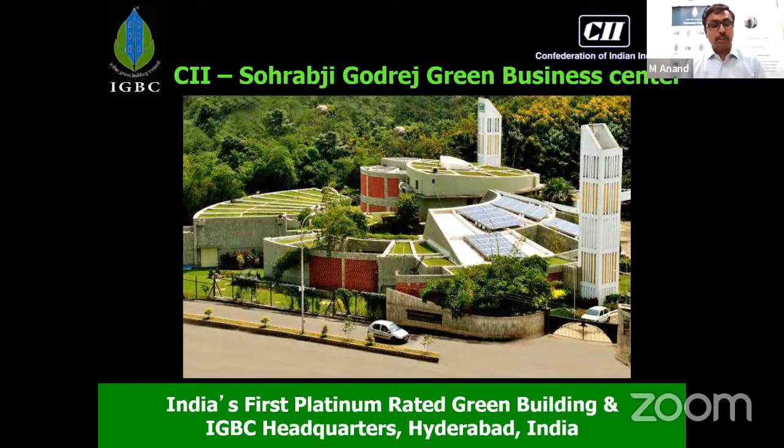Jain Saab was involved right from day one of our own IGBC headquarters becoming a world-class, world's greenest building. This is our own headquarters, CII Sohrabji Godrej Green Business Centre, which earned the World Green Building Council's title of world's greenest building, way back in 2003, 20 years ago, and India's first platinum rated building, wherein Dr. Jain Saab played a very pivotal role in getting this title.

This building got inaugurated by another champion, His Excellency late Dr. APJ Abdul Kalam Saab, on 14th of July. Dr. Jain Saab has interacted with Abdul Kalam Saab in very many forums of IGBC.

For those who are not part of IGBC, it stands for Indian Green Building Council, under CII, started way back in 2001.

The vision of the Indian Green Building Council is enabling sustainable built environment for all. When we say all, that includes human beings and all living beings on planet Earth - it goes beyond human beings. That gives IGBC a great canvas to do many initiatives and activities, which includes the Harit Prem Bharat Mahotsav 2023, and we in IGBC always look forward to these initiatives.

In the process, we want India to become one of the global leaders in sustainable built environment by 2025. Our chairman, Dr. Prem Jain Saab, always says Bharat should be the Jagat Guru of sustainability. That gives us enormous energy to recommit ourselves when we participate in Harit Prem Bharat Mahotsav again.

With the support of all stakeholders, we in IGBC are very proud to get enormous support from the government at both the center and the state, architects, MEP consultants, engineers, the common man, as well as MOU partners and developers - all of them today.

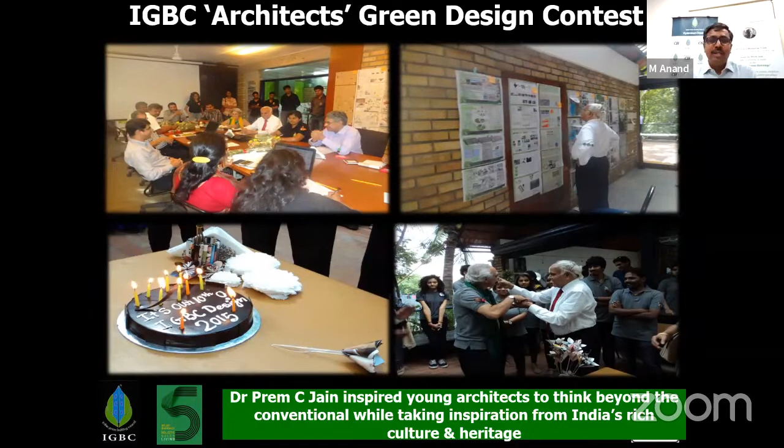Every architectural competition event, he would never miss it. In fact, Sharik Mistri's office is being fully converted into IGBC's office to showcase the architectural design competition. Every minute spent in those 2 days, we remember Dr. Jain Saab's presence - even today he is there in one corner, listening to all of us at the architecture office for this competition.

Fifth is the Green Building Congress - what it was before he took over, and what he added from 2005 onwards. You can see him along with Dr. Kalam Saab, sharing the dais as President of India, who came and addressed the event.

Till 2018, he shaped up the Green Building Congress and took it up in leaps and bounds, making it Asia's largest Green Building Congress and exhibition with the support of the entire IGBC board and stakeholders. These are the 5 elements I wanted to highlight as we celebrate the 5th year of the Harit, Prem, Bharat Mahotsav. To touch on a macro level, I will take a few more minutes.

Forging relationships - in fact, Dr...

And he also celebrates every single contribution by all of our stakeholders and the country's achievements. Here you see glimpses of the celebrations, cutting a cake for 5 billion, or launching new chapters. So he was always very, very keen in celebrating the success of India's growth on the IGBC.

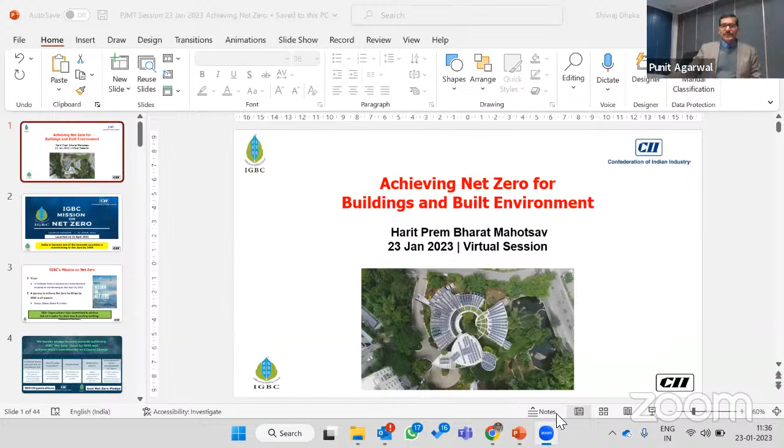Shivraj: Yeah Punit, just a moment, let me share the screen. Once it's visible, please let me know. Yes, it is visible. I will turn this off, make it full screen. Yeah, yes, okay. Is it full screen? Yeah, it's fine.

So good morning, everyone. It is my pleasure and privilege to be part of this very important program, Harit Prem Bharat Mahotsav. It is the first session, as we have already heard. It is always great to be part of a session where Mr. V. Suresh, past chairman of IGBC, is present. Thank you, sir, for setting the context for this program and highlighting key contributions of late Dr. Prem Jain. We are really thankful to Mr. Payal Jain for his virtual, gracious presence. My colleague, Mr. M. Anand, Deputy Executive Director, already mentioned the key milestones we have achieved in the past with the support of Dr. Prem Jain and his leadership to bring more and more green buildings all across the country.

So I would like to make a small presentation which will highlight the ways to achieve net zero. Let me start the presentation.

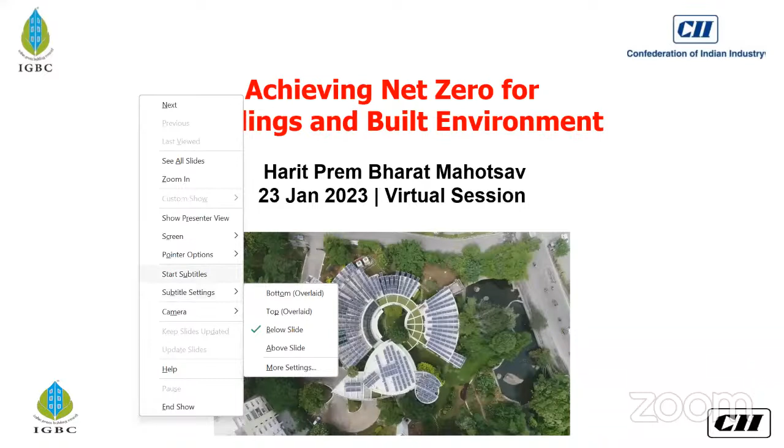The building you see here is IGBC headquarters, as my colleague Mr. Anand already mentioned. This is the first net zero project of the country, an existing project which has been transformed to net zero through deep retrofitting, including air conditioning, air distribution, the chiller plant, and many more things we did to convert this building into net zero.

IGBC started its mission on net zero in 2021, to have more corporates and building stakeholders aspire for net zero. But before that, in 2014, IGBC started dialogue on net zero and worked across the country to understand the building transformation journey, converting green buildings into net zero and creating a net zero movement. The mission of IGBC for net zero is to facilitate India to become one of the foremost countries in transforming to net zero by 2050.

This is a journey to achieve net zero buildings by 2050 in all aspects: net zero energy buildings, net zero water buildings, zero waste to landfill, and finally net zero carbon. Till date, more than 300 organizations, including the biggest corporates of India, have already committed to achieve net zero status for their new as well as existing building stocks.

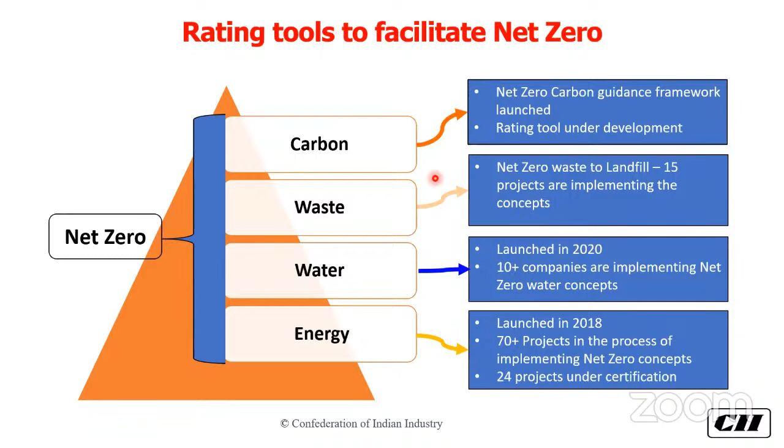Net zero waste, again, is not having much monetary benefit today, because it is a problem all across the country with regard to waste management. But slowly it will address some of the major milestones where we have this kind of issues, and waste would be 100% wealth for each project. Currently, we are running one project with Enterprise Singapore to bring some key technologies to India with regard to net zero waste. Friends, while having energy, water, and waste, we are completely at the edge to get net zero carbon. So there would be measures to address the scope 3 emissions, and have our buildings ready for net zero carbon, achieving it for most buildings with regard to energy, water, and waste. So IGBC has more than 100 projects all across the country with regard to this framework.

So let me introduce the IGBC definition with regard to net zero. Any building which has been designed for the lowest energy demand, and which can achieve the highest energy efficiency during operation, and whatever remaining energy we have, either for a new building to forecast, or for an operational building, this should come from renewable sources. This is the simple definition IGBC has set for net zero energy buildings.

This is well aligned with the policies of the Bureau of Energy Efficiency, wherein they have defined a net zero building as one that relies on renewable sources to produce as much energy as it uses, usually measured over a year. We cannot tell a building to become net zero energy on an hourly, daily, or monthly basis - it is very difficult to do that. But on an annual basis, if we do these calculations and are able to make it 100% grid energy replacement by renewable, we can call our building net zero.

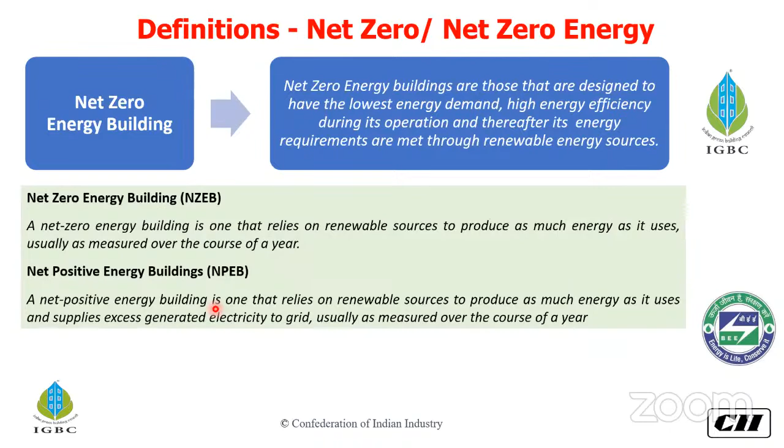With regard to net zero energy positive building, any building which has excess renewable energy generation compared to total energy consumption from the grid can be called net zero energy positive as well. So these are the benchmarks which are used by IGBC for net zero energy buildings.

Any building where EPI is less than 10 kWh per square meter per year can be called Shunya label, or a net zero energy building. Whereas Shunya label plus, or any building which is net zero energy positive, their EPI should be 0 or less. This is only possible when we have more renewable energy generation than our total grid energy consumption.

So the net zero energy building framework is voluntary, consensus-based, developed by IGBC. This rating system purely works on a performance-based approach. This means we cannot have a building that does not settle down its grid energy consumption through renewable. Only having 100% replacement of fossil fuel based energy by renewable can make it a net zero building.

This rating system, as mentioned earlier, was developed in 2018, having many projects all across the country of different size and shape. One of the most beneficial aspects of this rating system is that any building under design may address several passive measures which will reduce energy consumption throughout the lifespan of the building. The second part is that adoption of this rating system will definitely cut down the energy demand of the building - it can reduce 30% to 70% based on building size or typology, wherein we want to address the energy conservation building code as part of the design measures.

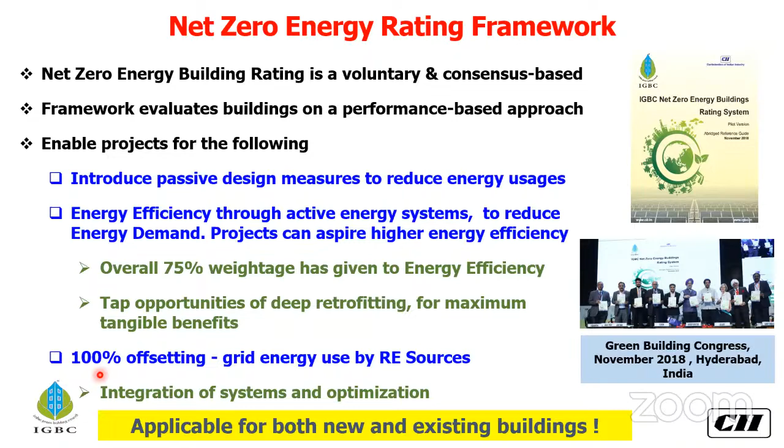This rating system also encourages and offers immense opportunities for existing buildings to understand and identify the gaps while having deep retrofitting, to achieve and set the target for net zero. But the condition extremely essential for all buildings to become net zero is 100% offsetting. So this rating system is applicable to any type of building, either new or existing, with regard to IGBC rating framework.

While having a net zero rating framework, there are two important policies which give better leverage for different project types: renewable energy policies, enforced and regulated by MNRE, as well as energy efficiency measures enforced by Bureau of Energy Efficiency. Both are well addressed in our rating system of net zero.

When we consider the holistic approach of net zero, there are a couple of important measures to remember. This rating system addresses specific measures - we may have 10 measures, we may have n number of measures. Each measure would be simulated to forecast how much energy can be reduced by implementing them. Whatever passive measures we put would help the building throughout its lifespan to reduce energy demand.

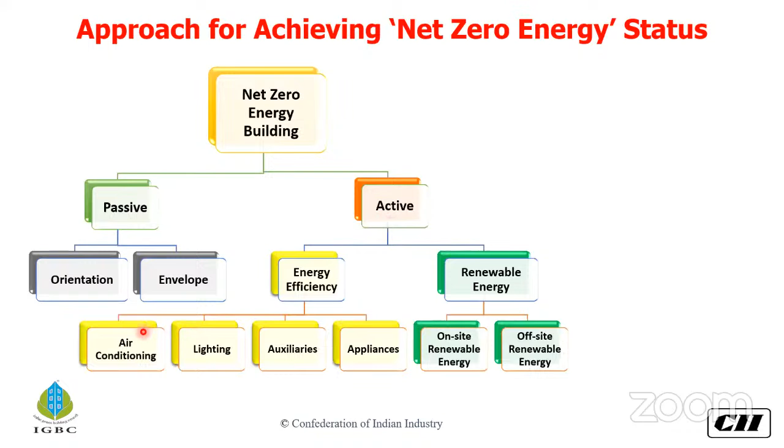When we talk about active energy efficiency measures, there could be measures related to air conditioning, lighting, auxiliaries, appliances. These measures would help the project reduce energy demand so that our dependency on renewables is much lesser. These are a couple of examples, passive and active, that can reduce building energy consumption.

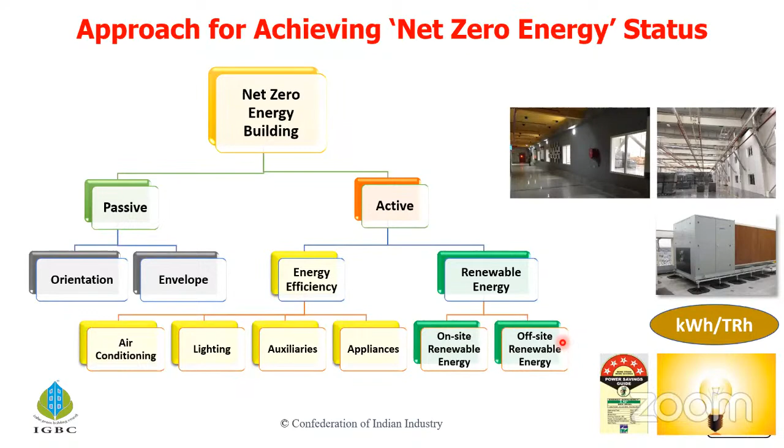Whatever energy consumption is left, because some buildings which are 24-hour operational may have huge energy intensity, it is not possible to have 100% on-site renewable. So a project may have on-site RE based on their capacity, utilization, or contract demand, and the remaining energy should come from off-site renewable sources, which can involve a purchase power agreement with the DISCOM or RE service providers. So considering energy efficiency will have huge benefits for the project.

When we have energy efficiency, let me tell you some projects have achieved and reduced energy consumption, starting from 172 down to double digits, less than 90. This kind of transformation would elevate the aspiration level for existing buildings to convert into net zero.

While coming to renewable energy, although the weightage is only 25%, it doesn't mean we're getting only 25% renewable energy for the project. 100% offsetting is essential, but the weightage on the point scale is 25%. So a project may have net metering, an on-site arrangement just to balance renewable versus fossil fuel-based energy, as well as go for metering with regard to wheeling, so that both would be accounted together to make the building net zero.

Some key requirements for net zero: first, the total energy consumption, whether from grid only, DG only, or grid and DG together, should be replaced by renewable generation. Second, this should also meet the compliance requirement with regard to ECBC 2017. There's an example here.

You can have a building consuming 1,30,000 units as per the ECBC requirement. In actual, this building may be consuming 1 lakh units. The built-up area is 2,000 square meters. We calculated the EPI, which stands for Energy Performance Index. The actual EPI of the building is 50, the design EPI is 65. This means our building is better than the compliance requirement. The EPI ratio, which is just dividing the actual by the design, is 0.76. This means we are meeting the compliance requirement and our building is far more efficient than the code compliance requirement.

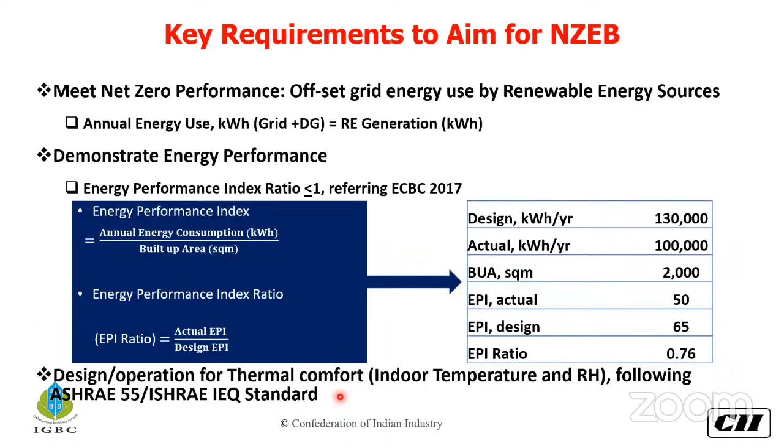The third important requirement is that any building designed for net zero should also satisfy the requirement of IEQ, Indoor Environment Quality. This means there would be some codal requirement with regard to ASHRAE 55 or ISHRAE IEQ standard. If you are meeting these targets, the building can certainly achieve net zero.

There are a couple of examples to highlight how to achieve energy efficiency. There would be requirements for envelope measures with regard to roof assembly, wall assembly, and the fenestration.

Second requirement is air conditioning, which is the main contributor for net zero, because more than 40 to 50%, or even more, of energy goes to air conditioning. The last requirement is lighting and appliances.

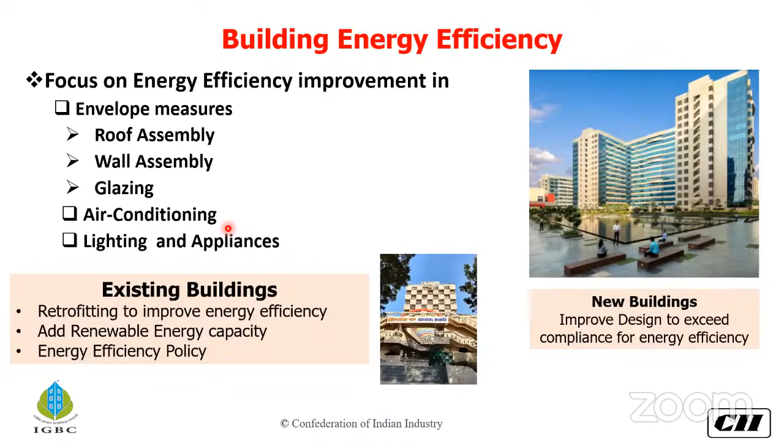I will just go through these quickly, as there are other slides where we may focus more. When we talk about roof assembly, there are requirements specified by the Bureau of Energy Efficiency. There are different climatic zones, and we should focus on achieving the lowest U-factor, or overall heat transfer coefficient, so that heat ingress is reduced, which helps reduce the sizing of the air conditioning. These are some of the other requirements for wall infrastructure or wall assembly with regard to code compliance.

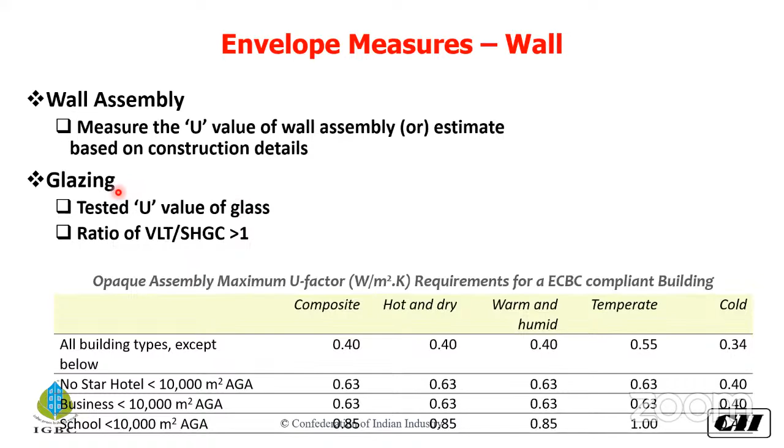But we should also look after the fenestration part very carefully, so that heat penetration is much less through the glass.

With air conditioning, where maximum conservation is possible, we have to focus on what coefficient of performance or IPLV is appropriate for the air conditioning system selected for our building. This is very important because most buildings would have this opportunity.

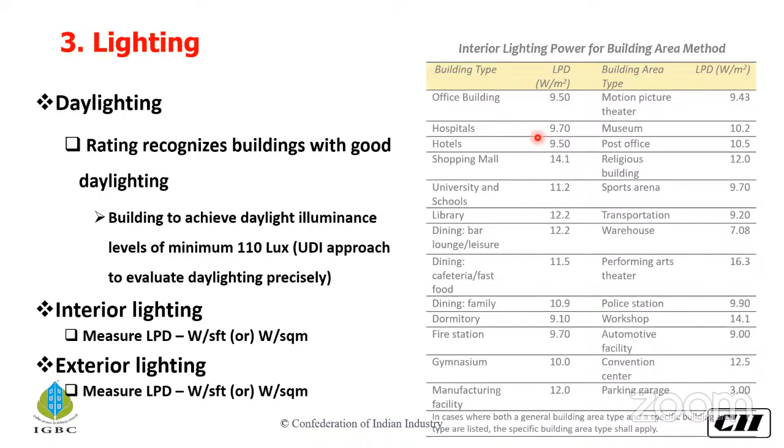There is an opportunity to reduce energy consumption by introducing more daylight, as well as focusing on reducing lighting power density. There's a table given here that specifies what the lighting power density should be for a given office building, hotel, hospital, or any other type of building.

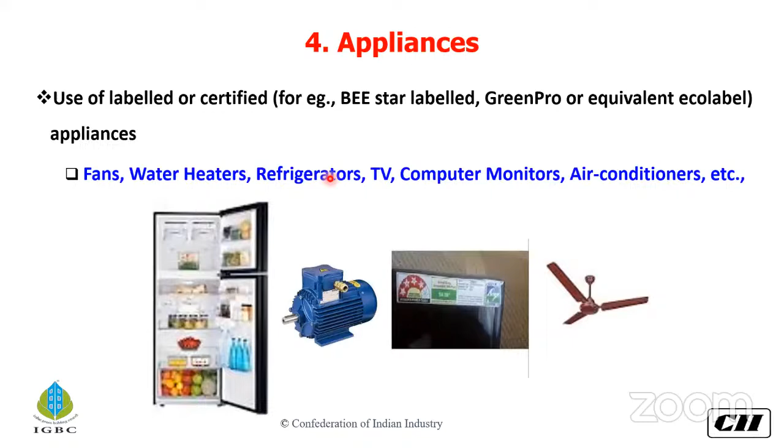There are more requirements with regard to appliances. More than 17 to 18 different categories of appliances are rated by the Bureau of Energy Efficiency and green product certification, wherein several products are certified. If we use these products in any net zero building, they would simply reduce our energy consumption and bring more energy efficiency into the project.

The last part is renewable energy. There is a mandatory requirement to have at least 5% on-site renewable energy, but most projects with daytime operation may harness more renewable power during the day. At nighttime, it's not easy for them, and they may not have the opportunity for a windmill. So these projects tie up with RE vendors for hybrid power, combining solar and wind, so there's supply of power throughout the day and night.

There are two certification levels with regard to net zero energy. One is net zero energy, wherein a project may achieve the highest energy efficiency, but there's a limitation on not having 100% renewable on site. This kind of project can get a net zero energy status.

The net zero energy platinum means a project is able to have more renewable energy on site. At the same time, it has energy efficiency, and both the renewable and energy efficiency scores together give more than 80 credit points out of a 100-point scale.

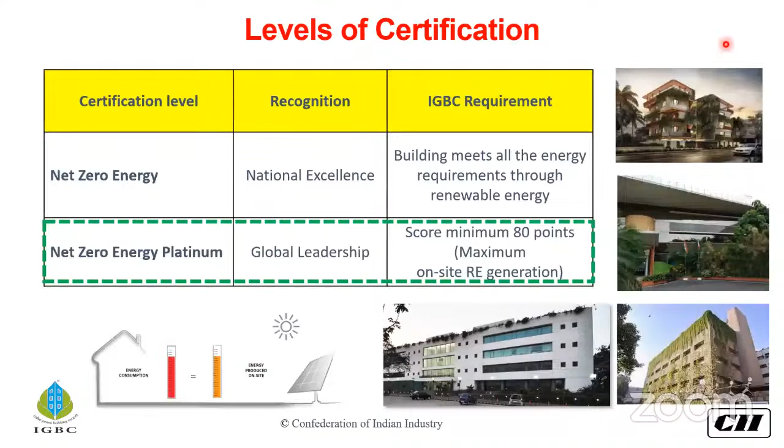There are a couple of photographs of some early adopters of net zero energy. If we talk about the most tangible benefit of net zero, it's getting a reduced energy bill of at least 30 to 40%, based on the building type, size, or usability. It will also have lower power demand. And if we understand the hierarchy of energy use reduction, it may affect several components in the building, including wiring, transformers, and many other equipment.

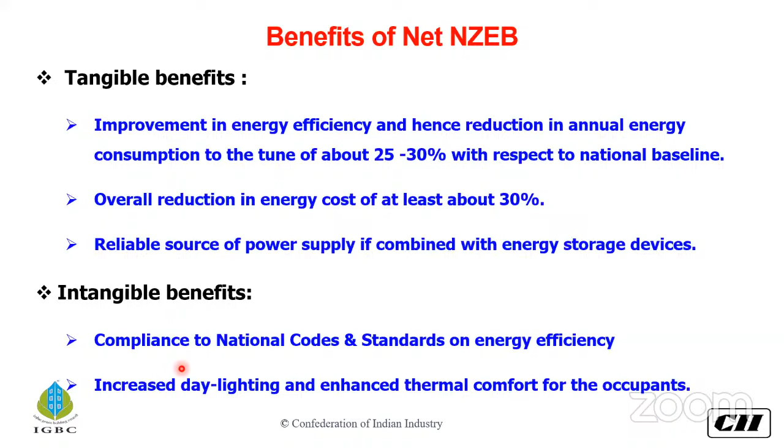But getting the tangible benefit is not the only mandatory condition today. There are many compliance requirements across the country, starting from the Bureau of Energy Efficiency, SEBI, and many others. There are intangible benefits and compliance requirements for net zero energy buildings for several projects or corporates. Projects are doing this because they've already committed to climate change mitigation measures, and they're getting more intangible benefits out of that.

I'd like to show you one case study, of the IGBC headquarters: complete retrofitting of all chillers, although they were the highest energy efficient in the industry when installed in 2001 or so. When we retrofitted them, we found the highest energy efficiency while having part load efficiency, because our office is not loaded at 100% occupancy throughout the year.

So it's really important what kind of equipment we select, based on the typology of our office as well as its usability. This is showing how we did the retrofitting of the lighting system.

You are able to see many lighting fixtures installed because their efficacy is less. These are CFL based lighting fixtures. Their number was more than 211, but when we retrofitted with LED, they are hardly 86. Their efficacy is more than double what we had with CFL, and their wattage is just half. So this is the impact of having LED based lighting fixtures.

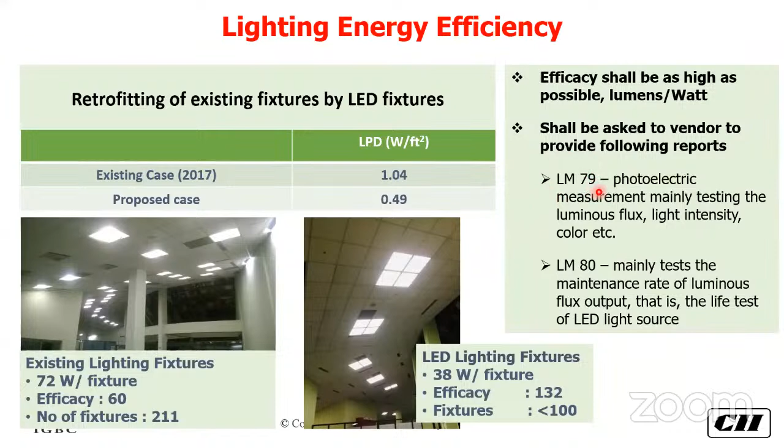But we should really care what kind of lighting fixtures can be procured. We should ask the vendor to give the LM79 report and LM80 report, so that we get the highest quality of LED fixtures. This is showing what could be the tangible benefits.

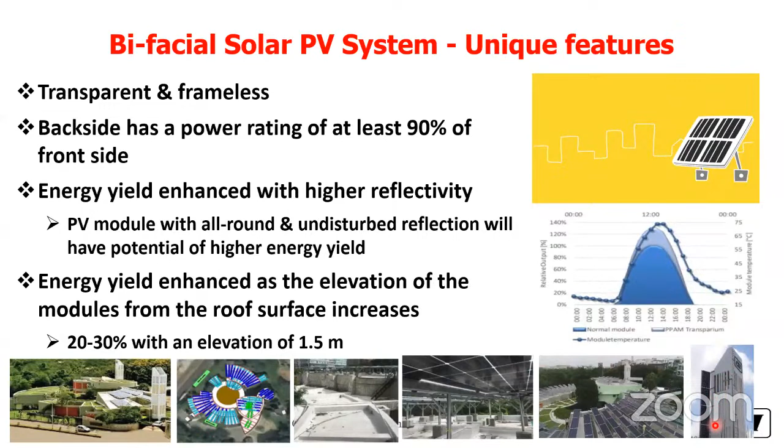This is how our building is completely integrated with the solar photovoltaic system all across the top. We have also put vertical panels, which will generate energy in the first half from the east and second half from the west. These are some of the specs. My colleague Puneet will be sharing this presentation with all the attendees, so I would not like to stress more on the spec part.

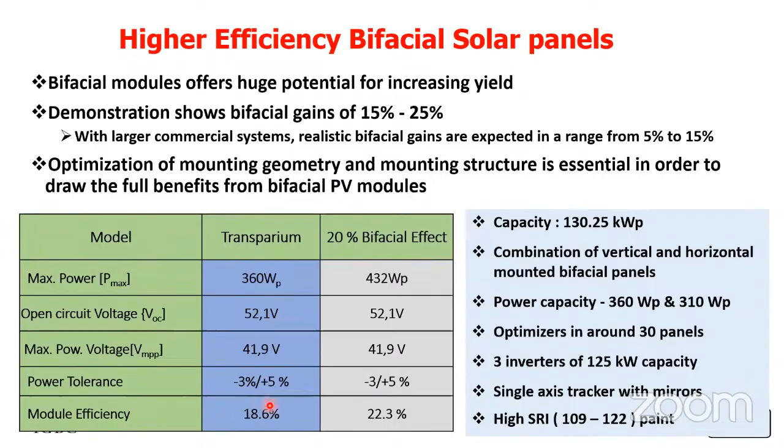We have also put a sophisticated building management system, and this system diagnoses where we have more and more opportunities to save energy with regard to air distribution or chiller plant operation, or how we can further optimize so that we can get maximum savings from the BMS system.

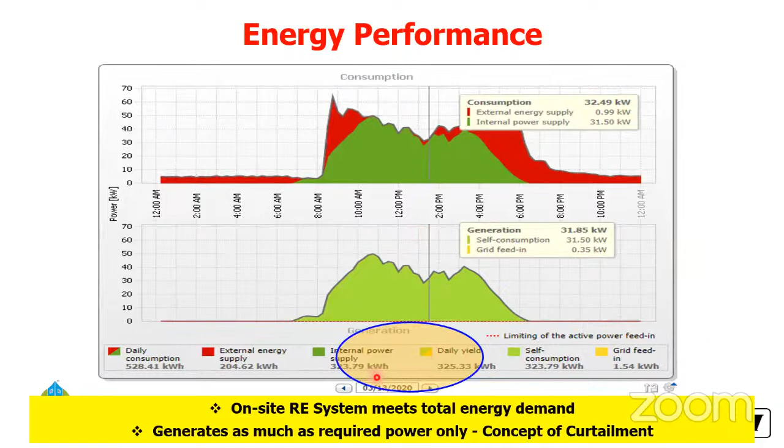This is the real-time performance of our building recorded some time back. You are able to see the total installed power is less than what we have total consumed for a given period. This is the graph showing for 2020. Before this, we did not have net metering, so we are not able to show you what is the grid feed and energy from renewable sources.

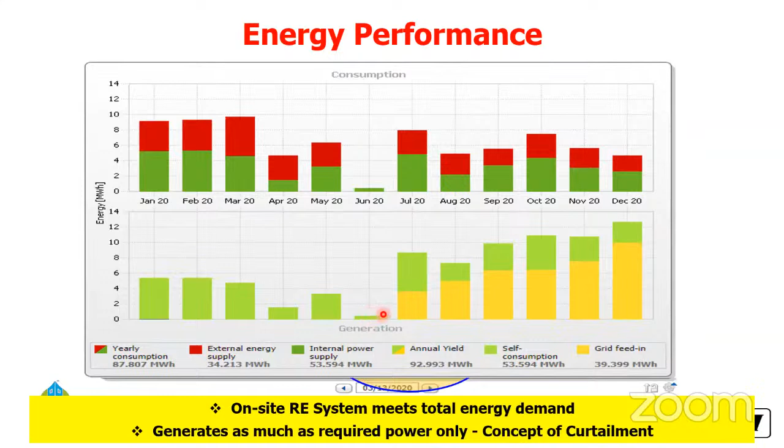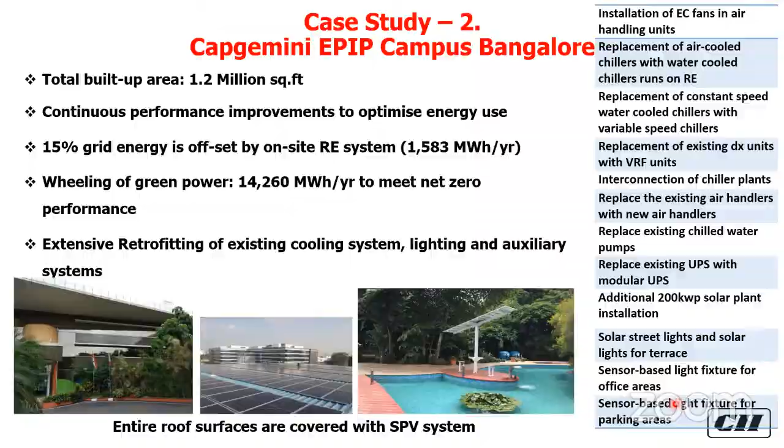We did some good work with regard to joint association or joint initiatives with Shakti Sustainable Energy Foundation, wherein we published some compendium. You can refer to it from the IGBC website. This compendium can help projects identify which technology can be integrated into the project so that they can aspire for net zero. Similarly, there are some policy measures which are analyzed thoroughly for some states, showing which policy gives better results while going for net zero.

Recently, we started one more joint initiative program with Enterprise Singapore, wherein we are trying to facilitate more and more Indian corporates to become net zero by introducing some of the latest, emerging technologies to them to become net zero in energy, water, waste, and carbon.

When we talk about net zero water, it is very simple, but really difficult to achieve for some projects where we are not able to harvest and reuse water. So for any project going for net zero water, we have to have minimum raw water consumption. Raw water means any water coming from the municipal tanker or the bore well. At the same time, our job is to have more and more alternate water. Alternate water is the water coming from rain, or from water reuse after treatment.

Both the water consumption should be equivalent or should replace 100% of the fresh water quantity, which we are taking from any source of water - tanker, bore well, or municipal supply. If we are able to replace this water, this project can become net zero water.

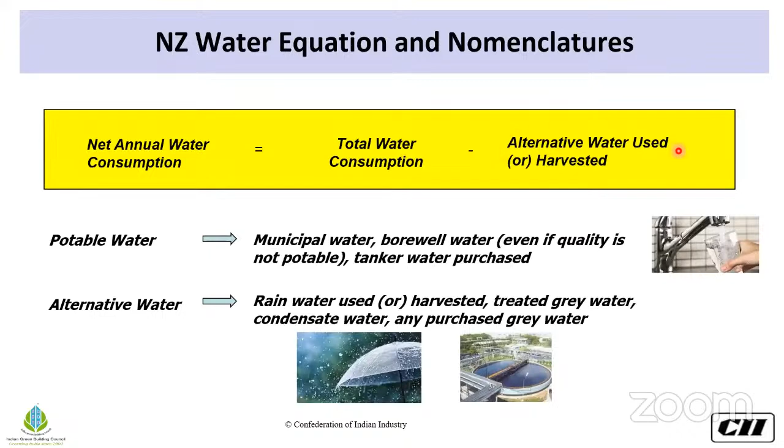So this is a simple equation. Any project can test it, try it. If their total raw water consumption is replaced by 100% alternate water, this means the rainwater and the water treatment project can become net zero. I will tell you how to calculate that in some of the coming slides.

This is the holistic approach while becoming net zero. First, projects should cut down the water demand. Projects should explore more and more harnessing of water - this means the rainwater as well as the treated water to be used in the project.

Any of the projects which are doing both activities still will have opportunity - it can be called return water back to the source. This means whatever water we use for the project, if we are able to give back more than that to nature, our project will get more and more reward for it.

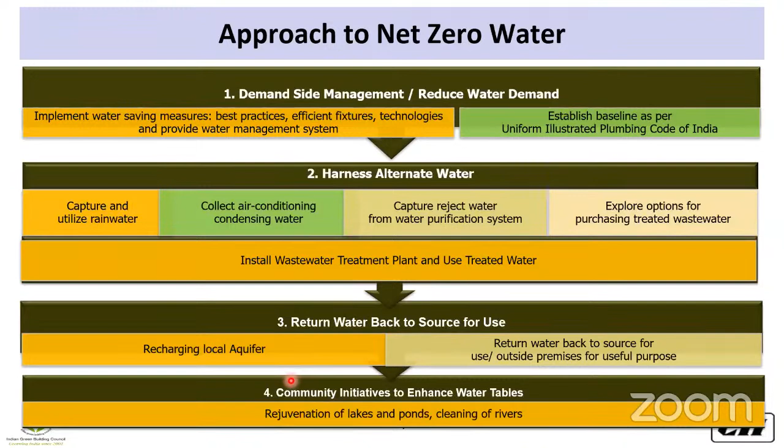The last activity is we can take part in one of the community initiatives to enhance the water table. So there are some examples of how to check the water efficiency.

These requirements are well defined in the National Building Code of India, where our past chairman, Mr. V. Suresh, has contributed significantly with regard to NBC development and some chapters introduced in the NBC. So again, when we talk about harnessing water, only the major source would be water recharge, water collection.

Water collection means we have to create some opportunities with regard to a pond or rainwater harvesting pond, so that we can collect the water and reuse this water.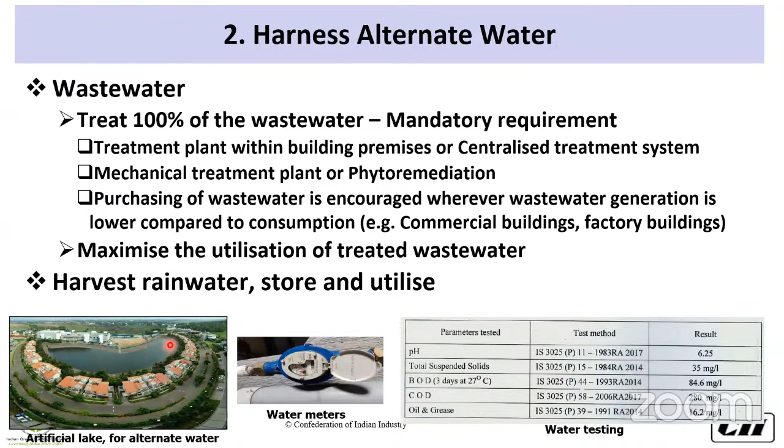This is one of the finest projects we certified long back - Sobha City, Thrissur, where this artificial lake has been created, and this is the only water source for the entire project, wherein you have villas, a commercial complex, and multi-dwelling residential units.

So this kind of requirement is well defined, and this is the approach just to identify, just to evaluate whether my project is towards net zero, near net zero, or 100% net zero.

We should have the complete alternate water consumption of the project and the total water consumption. If we divide them, we get numbers like 0.5, 0.75, 1, 0.8. This means if we get 0.75, our project is able to replace 75% of the water requirement by alternate water.

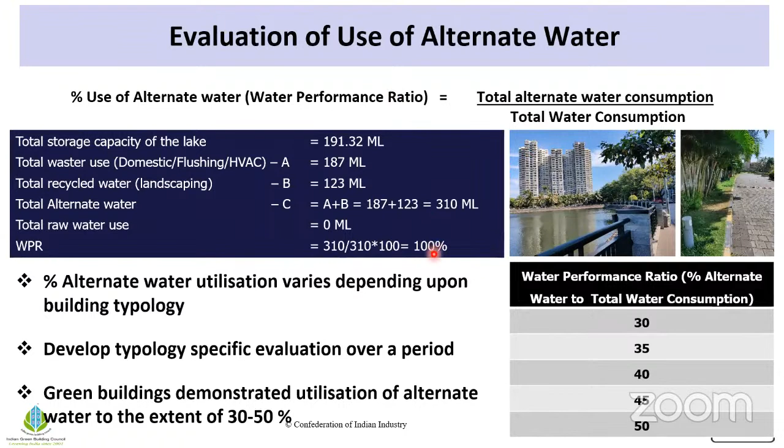WPR stands for water performance ratio. This means 100% of the water comes from alternate sources. There is no other way to get the water.

This showcases whether our project can become net water positive or not. If that is the case, we have to give back water more and more to mother nature, to the motherland also. This is the calculation: water recharge, water return, or water source.

Water can also be sold to some designated consumers, or any project which would like to reuse the water which is treated. With this calculation, we can also understand whether my project can become net water positive or not.

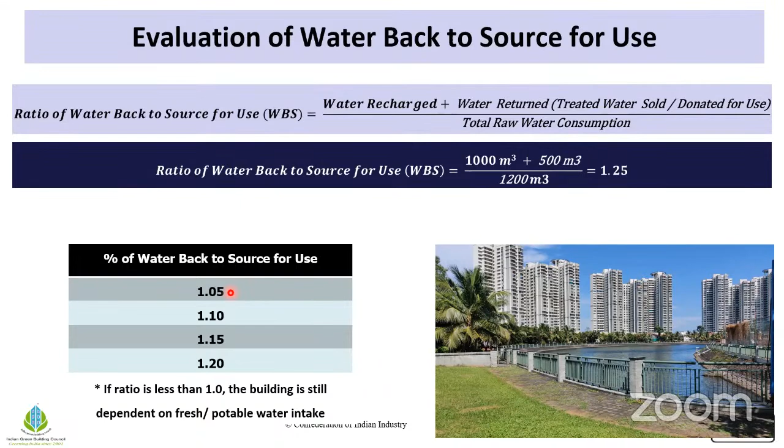So if any number comes more than 1, there is a high chance to get net water positive, but it is really difficult for any project, because there is investment, there is more benefit, but we should have the will for achieving net water positive.

Some projects are able to give back the water, or this water can be channelized further to farmland or some farmers, so that they are able to reuse this water which is just collected into the lake also. These are some of the conditions for achieving the net water status.

If any project is getting a water performance ratio between 0.75 and 1, the project may achieve near net zero water. If this is 1, the project can get net zero water. If this is more than 1.10, this means water given back to the source is more than 100%.

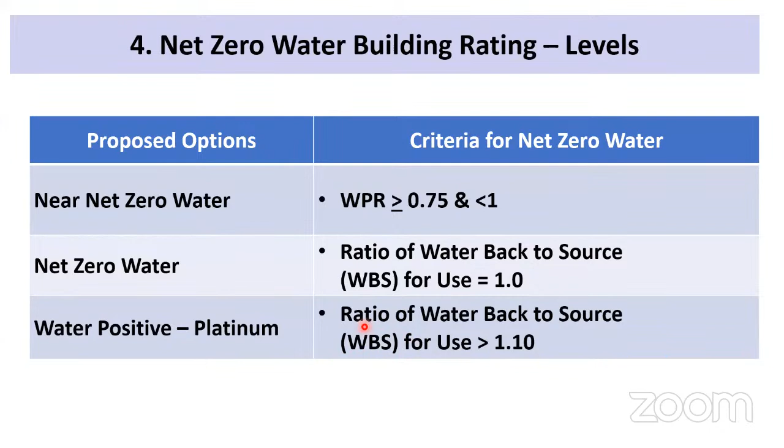This kind of project can become water positive. Let me tell you the small story of net zero waste to landfill.

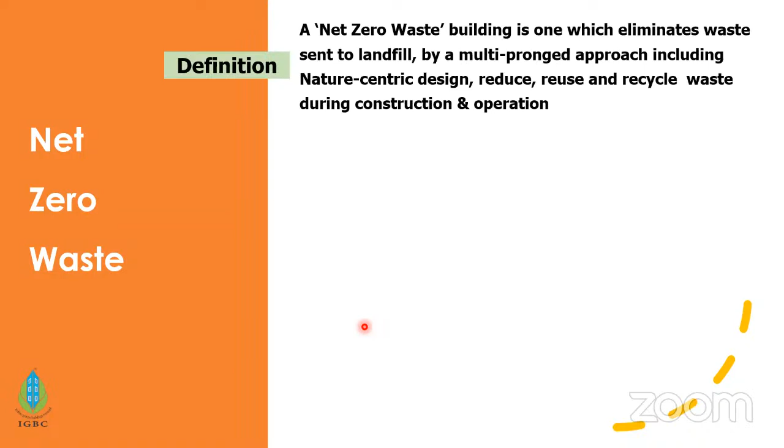This is really important, and this is a problem everywhere across the country. So IGBC is supporting projects to become net zero waste or zero waste to landfill. There should be no waste coming or going to land designated by government or agencies just to dump waste.

So this waste should first be reduced. We can reuse this waste in many different forms, and it can be recycled. This is applicable whether we have a design project, construction, or operation. There are different approaches and compliance options defined for projects to achieve it.

This is the simple calculation for how to identify a project set to go for zero waste to landfill. These are the stakeholders who can adapt it - owner, developer, tenant during operation, or any project in design and construction, or any project which is 100% operational can adapt this rating system.

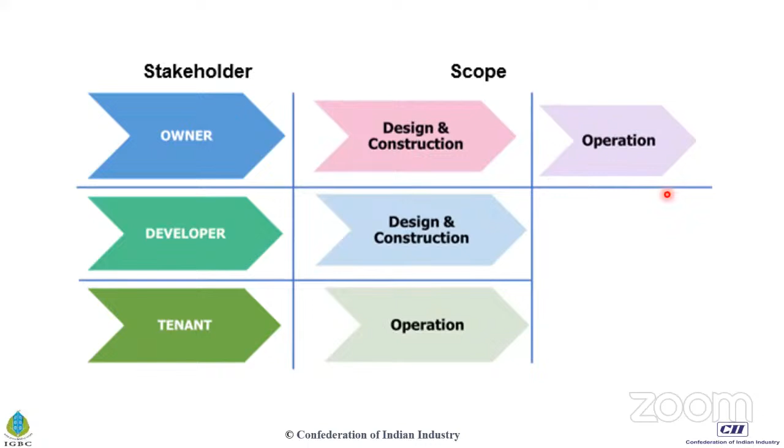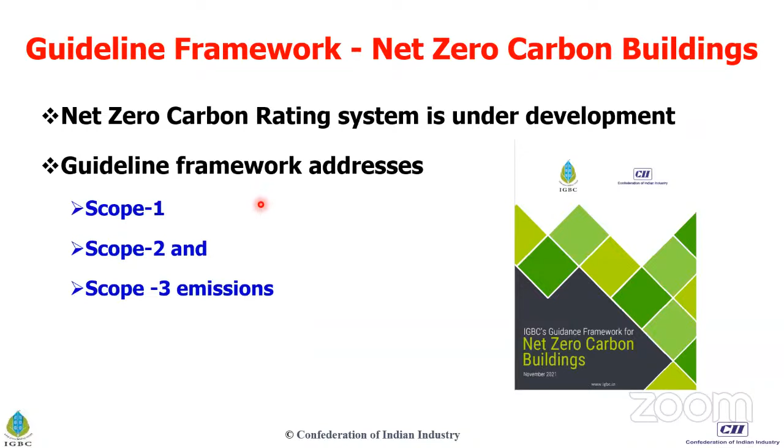Last but not least, the rating system for net zero carbon is under development, but only the guiding framework was developed in 2021. It addressed GHG inventorization for scope 1, scope 2, as well as scope 3. This rating system would soon be ready by end of this year.

There are immense tangible benefits for any project going for net zero with regard to energy efficiency, water efficiency, waste management, and reduced GHG emissions. If you talk about renewable energy, there would be more and more focus given here, and it will also give huge tangible benefits to the project.

Alternate water has tremendous scope for any factories or large residential blocks to reduce water as well as energy costs. So net zero is making a 100% business case from day one.

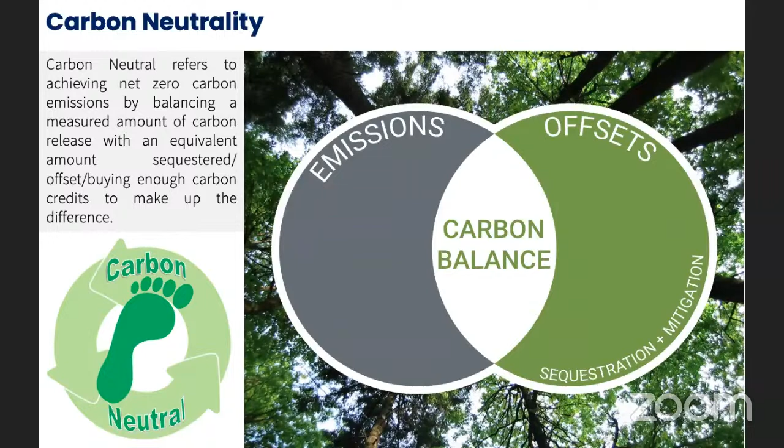Carbon reduction is basically achieved by first calculating our carbon footprint, which is on the left hand side of the image that you see. What are the emissions as far as our materials, construction, operational and design elements are concerned? All of that is taken into account to identify what the carbon footprint is. On the right hand side, what you see is carbon balancing, which is done through strategies like renewable energy on-site, renewable energy off-site, carbon storage, etc. So once we achieve a balance, that's where we really reach carbon neutrality or net zero carbon.

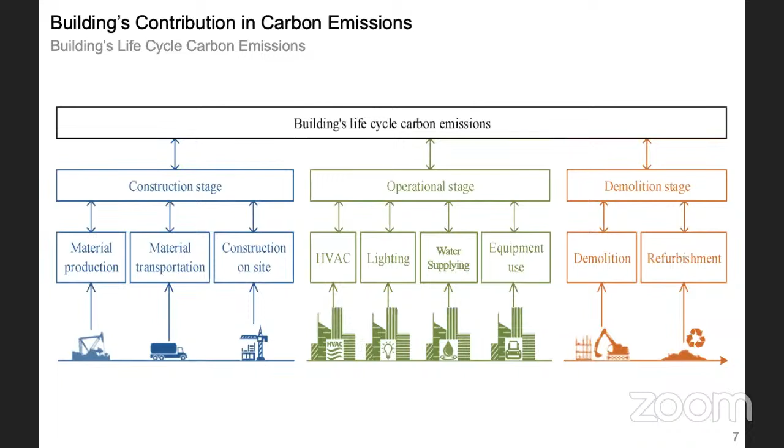As we see buildings' life cycle carbon emissions, it ranges across all stages of the life cycle of a building, starting right from design, construction stage, operational stage, and also demolition stage. We are yet to see for our buildings the last stage, which is demolition, in many cases. There are a few which are still happening, but I think construction and operational stage, being a developing country, is something which is majorly ahead of us, where we can reduce our carbon emissions significantly.

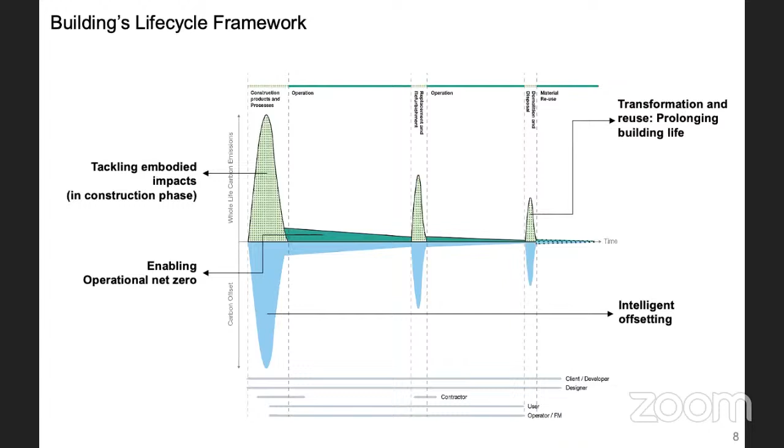This particular graph that you see is basically representing the life cycle of a building. These major spikes that you see, the first spike is when our carbon emissions go up during the construction of the building, or the manufacturing of the products. In the operational phase it reduces, while it again goes up wherever there is any kind of refurbishment, because that's where the energy consumption and carbon emissions keep increasing. And at the end of the building life cycle is the demolition phase. At each of these stages, we have to see how the carbon is going up and how can we offset that through our mitigation strategies.

There are 139 countries who have already committed to net zero and carbon neutrality. And India has become one of the latest countries to declare, at COP26, our carbon neutrality stage, which is 2070, which is one of the last. However, the goals are being set to achieve much earlier. You've heard in the last presentation wherein IGBC goals are also aligned to reach there by 2050. And that's where the whole efforts are actually being put.

There are 5-stage commitments as far as India is concerned, including: by 2030, we have to have a non-fossil fuel energy capacity target of 500 gigawatts. By 2030, 50% of our energy requirements to be met through renewable energy. By 2030, reduction in the total projected carbon emissions by 1 billion tons, and reduction in carbon intensity by 45%. And reaching net zero emissions by 2070. These are the targets which have actually led our whole country in this direction.

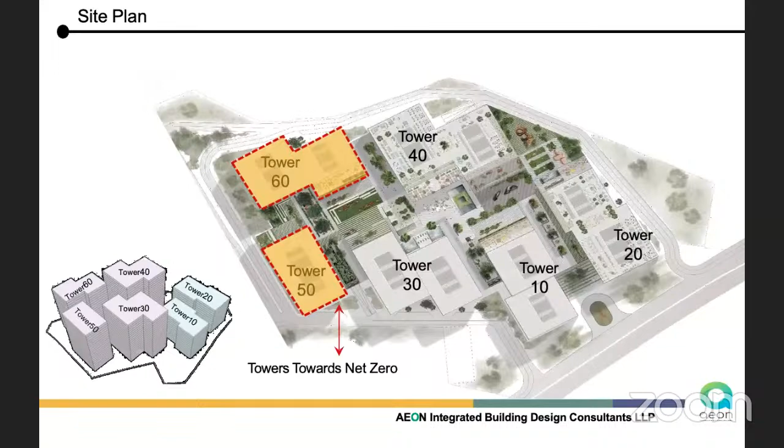This is one of our commercial projects wherein net zero energy, water, and waste is taken up. This is a large campus project having 6 buildings, and 2 of the buildings are really looking at net zero energy, water, and waste. This is the overall sustainability vision for the project.

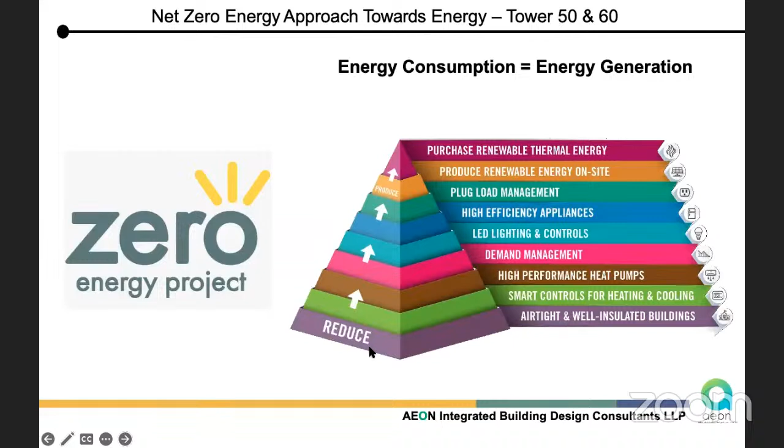When we talk about net zero, I think we've heard in our last presentation also, the key lies in how much can we actually reduce our consumption and then offset it through renewable energy, which is what has been one of the main focuses when we laid out our strategy for this project also, looking at the design strategies and features, starting from the passive concept stage features to high performance envelopes, daylighting control and shading strategies, natural ventilation, and energy efficiency strategies for all the electromechanical systems.

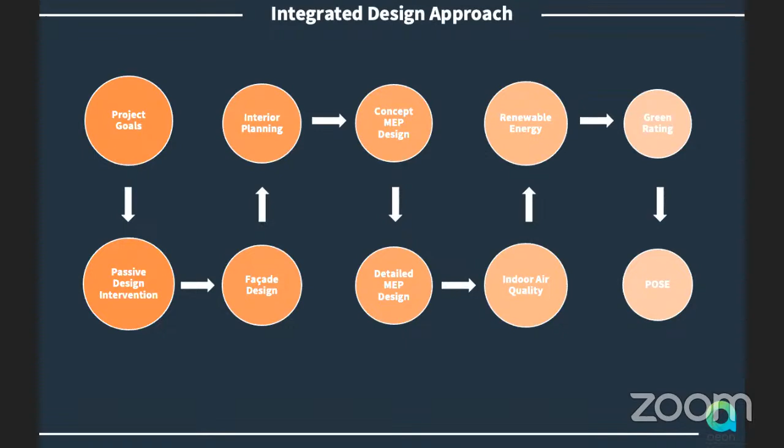An approach has been taken wherein integrated design approach is being followed, right starting from the project goals to passive design, to facade design, interior planning, MEP design. Because when we talk of net zero, there's nothing that can be left out. There is no one discipline which can commit to net zero on its own. It is the integrated design which is important, and that is what is being taken here.

BIM is one of the integral parts. What we have seen is it's helping to reduce a lot of design inefficiencies and have much more coordinated designs, which is being applied across all the disciplines in the project.

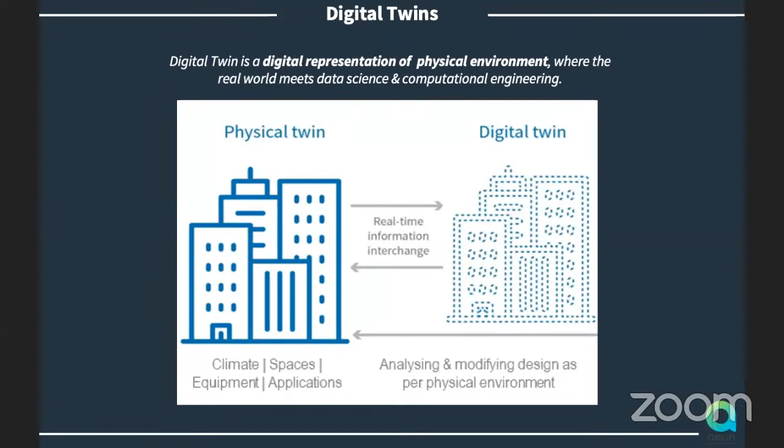Digital twin is very important when we talk of the net zero concept, because before the building is actually constructed, we want to see how it's going to perform on various elements, and real-time information exchange can happen at later stages within the building's electromechanical systems.

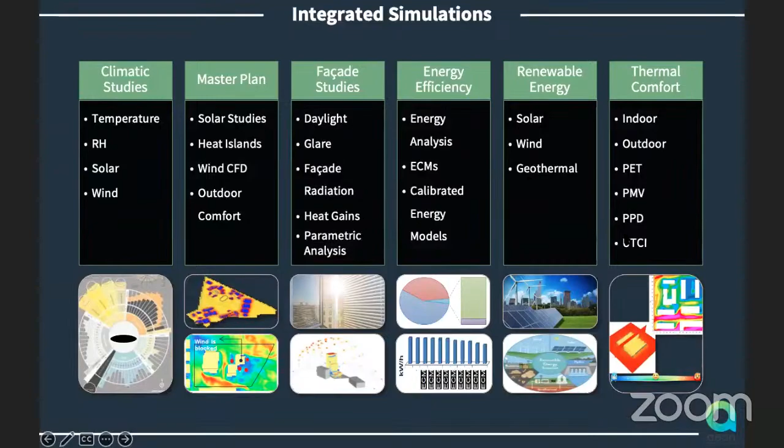Looking at the master plan, being a large development, it's very important how efficient the master plan is, how we are taking care of the solar and wind patterns at the site to maximum advantage, looking at facade, energy efficiency, integrating renewables, and also looking at outdoor comfort.

Some examples I'll show through these facade studies that have been done. This is how the overall radiation levels, daylight levels, and glare levels of each of the floors in these buildings have been analyzed.

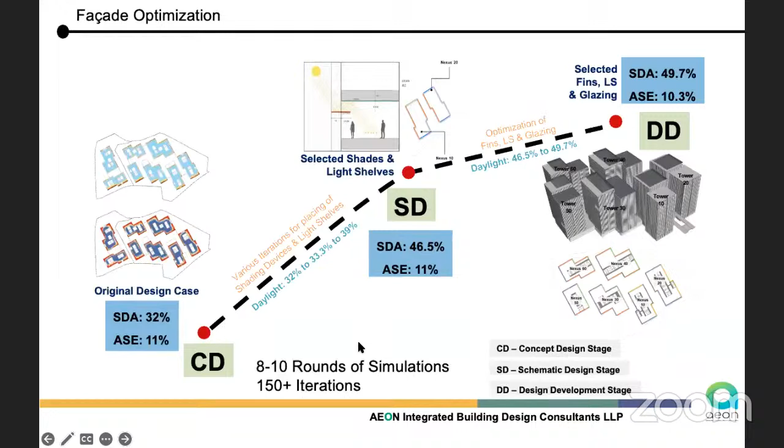CD, SD, DD are the stages of design, showing how the designs have progressed through each of these stages, with the focus being to make the building as efficient as possible, so we can reduce the amount of energy we would need to offset.

There's been a lot of design iteration as far as the building facade design is concerned, looking at the various shading type of devices.

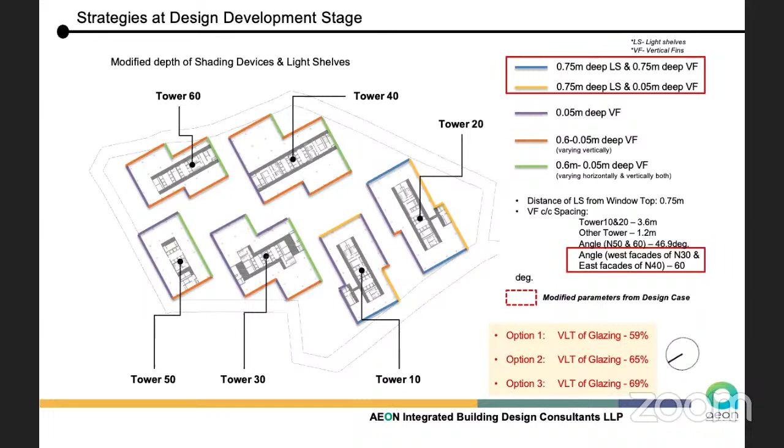Looking at daylit spaces from different stages of the design, how it's improving, and how the glare has been reduced across the stages.

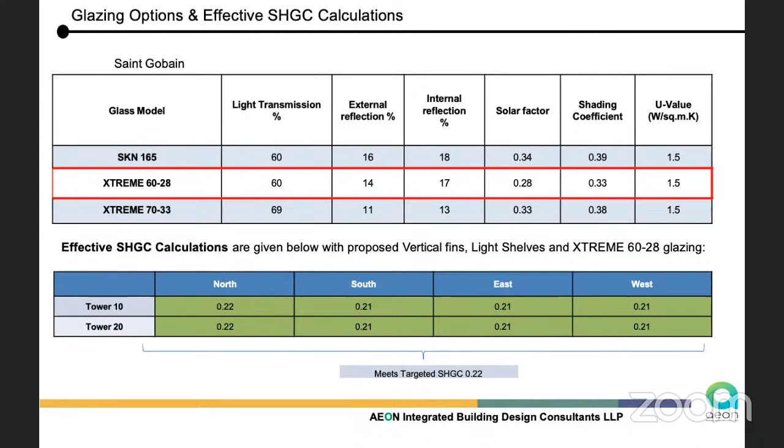Glazing selection involves not only selecting the right glazing but also integrating facade shading elements into account during that selection. These are all very important aspects from the energy and also the sizing of electromechanical systems.

This is how the energy consumption of the building comes out, with an EPI of around 86 for Tower 50 and 85 EPI for Tower 60. Looking at some additional energy conservation measures, the energy performance indexes have been dropped further.

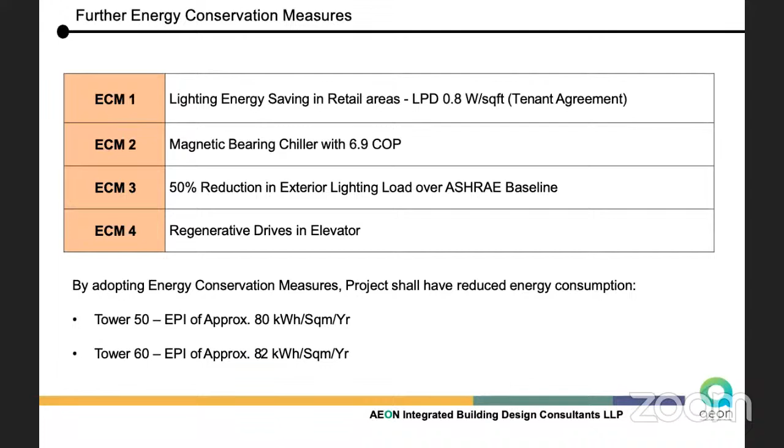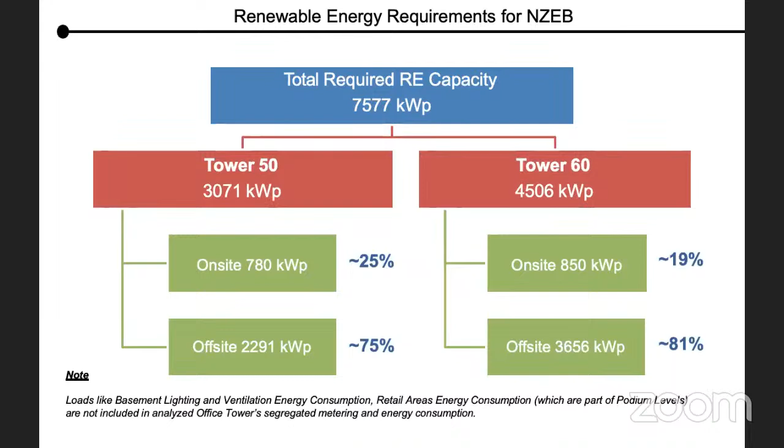The offset through renewable energy on-site and off-site is a combined strategy being taken. Around 20 to 25%, being high-rise buildings, is the capacity of solar that can be integrated there, and the rest will have to be offset through off-site energy. This is how the energy numbers are looking for the project.

Looking at net zero water for Tower 50, this is how the water balance and numbers look. Around 223 KLD of the water demand water is going to the STP, using 100% treated water, doing rainwater harvesting as the main strategies, after really incorporating the energy and water conservation measures, all of which have been accounted for in the project.

Once we look at the overall numbers for water, we are around 78% reduced in terms of water consumption, and the balance is taken up through rainwater holding capacity tanks or the additional STP, which is also being looked at.

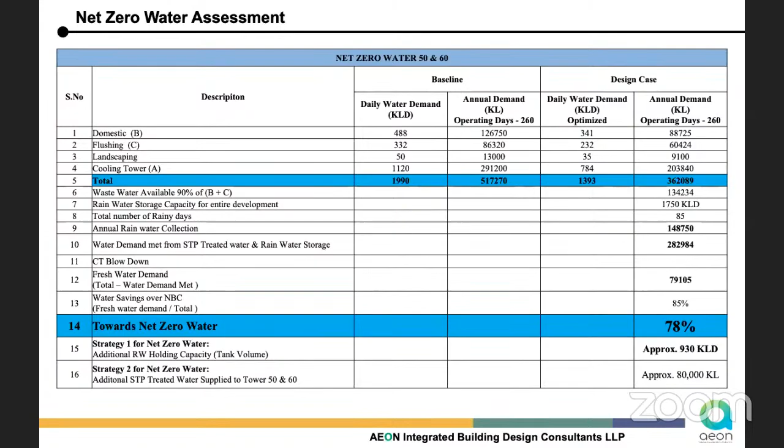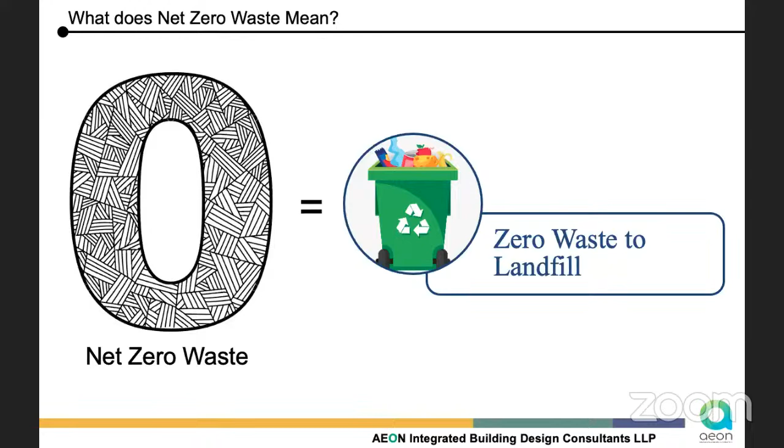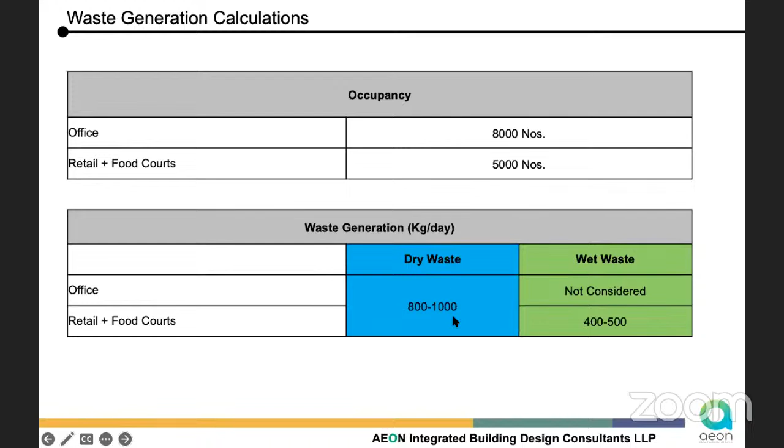The waste generation, based on the occupancy of the buildings, has been derived, and around 1,000 kilogram per day is the dry waste and 500 kg per day is the wet waste.

There was a comparison of different organic waste conversion technologies, and out of that, a biogas plant is actually being adopted for treatment of the wet waste generated at site, because it is more robust and gives a byproduct in the form of not only manure in liquid form for landscaping, but also biogas which can be used for cooking purposes in the same project.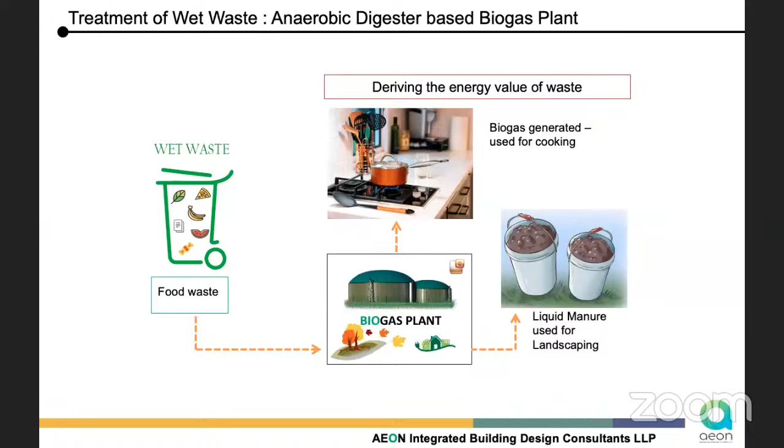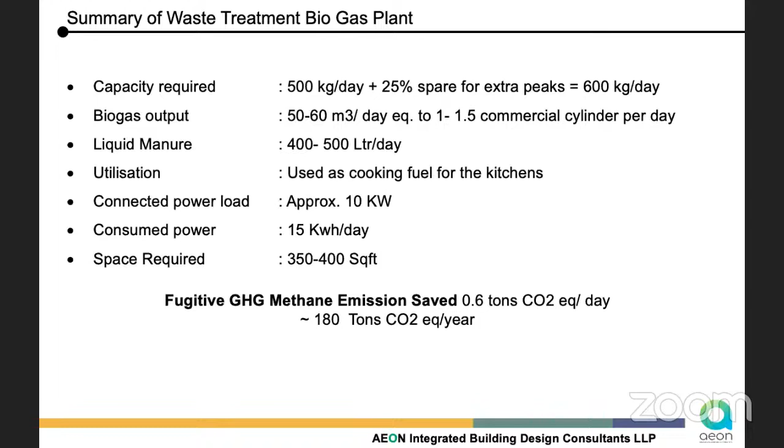This is just a flow chart of that, and by doing that, there is a fugitive GHG methane emission which is saved for around 0.6 tons CO2 equivalent per day. Around 180 tons CO2 equivalent per year is saved through the net zero waste strategy alone. The project is looking at certifications of energy, water, waste, and also looking at well certification and the net zero development. This is another project.

I'm being a little fast because of the time limit, and we can discuss the Q&A after this. This is a township project being taken up for low carbon and sustainable development. The whole vision is to achieve low carbon development as we go along the path of carbon neutrality and achieve high levels of sustainability by net zero.

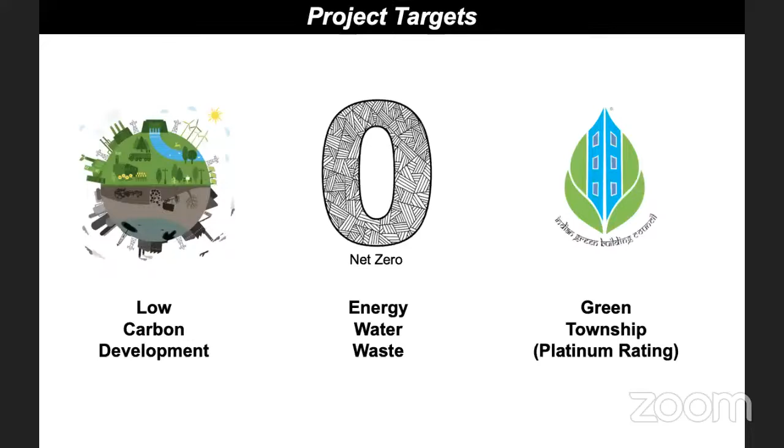Now, carbon neutrality is something which is not an overnight achievement. It is a journey, where we have to start somewhere and keep measuring and tracking as we go along. These are the targets for the project, wherein low carbon development, net zero energy, water, waste, and green township rating are all integrated elements being looked at.

When we look at the low carbon part of the project, two main activities we have to look at: number one is to control the emissions, and second is to balance the emissions. These are the strategies being taken for the carbon neutrality path, starting from net zero energy, then net zero water, net zero waste, renewable energy, also looking at the forestry element on site, how much can we incorporate that, comprehensive transport management, building materials, and operation and maintenance.

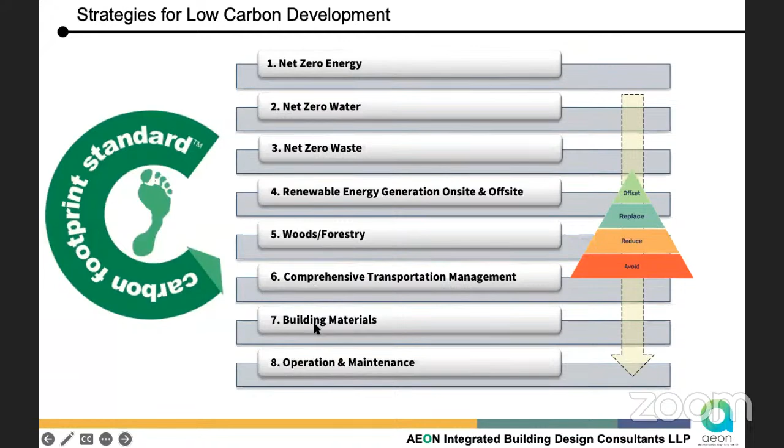Looking at net zero energy first, based on the consumption patterns for different buildings that we have on the project, the requirement of solar coming out is around 1.2 megawatt of solar panels, which is what is being taken up as a 3-acre solar farm. In this project, we could not use too much of the roof area because the roof design is such that it cannot accommodate too much solar panel. We have a sloping roof, so not all roof areas can be used. So solar farm is being taken as one of the key strategies for generating all of the renewable energy and using it in the project.

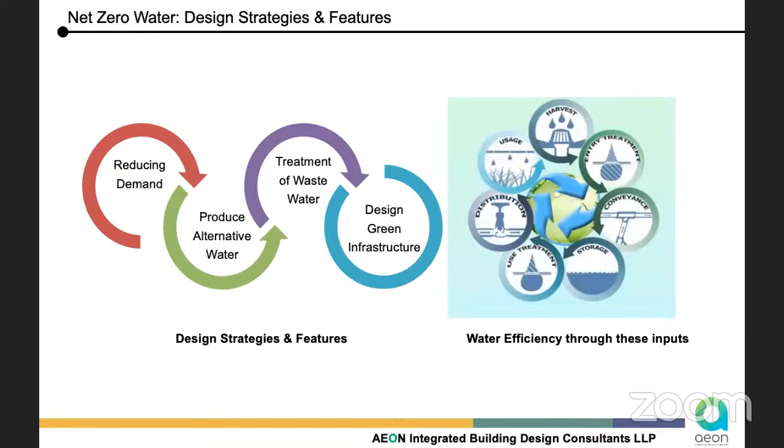For net zero water, the key lies in reducing the demand, as we heard, and producing alternative water, treating wastewater, and designing the green infrastructure, with overall water efficiency being taken into account.

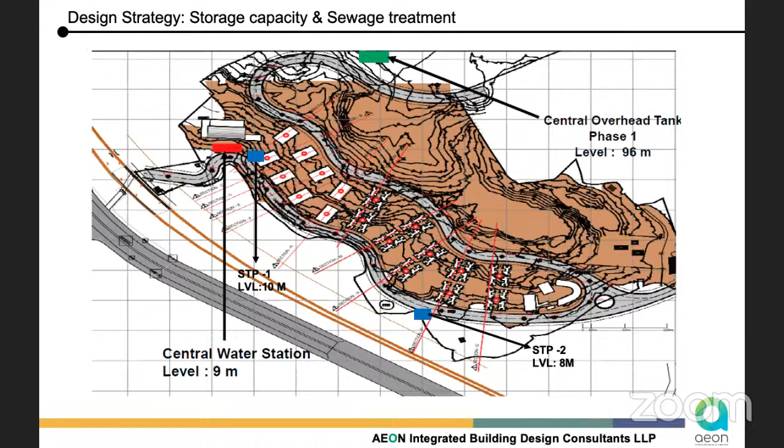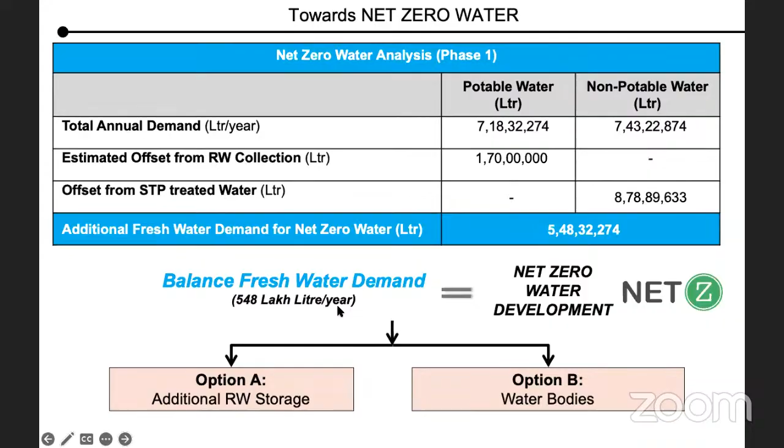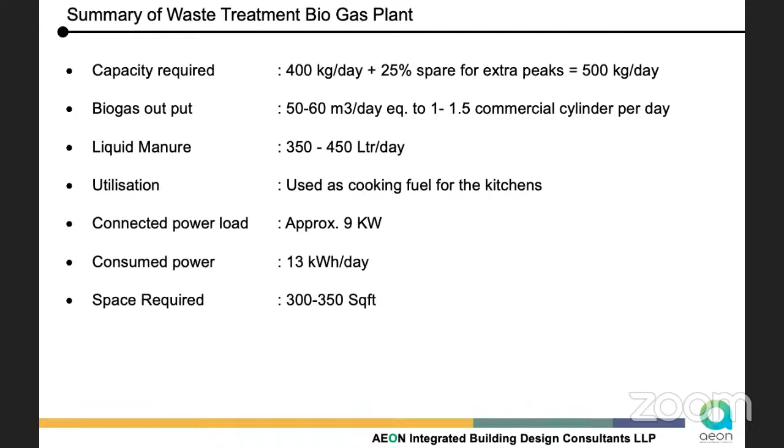Net zero waste, we have around 2,000 people population, wherein we are using a biogas plant for treating all of the waste coming out of the project, and that is being used to achieve net zero waste.

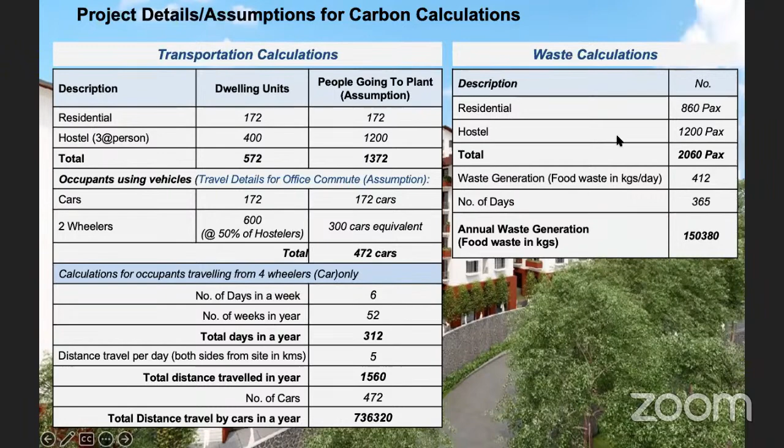Carbon emissions, we have also looked at from different areas how many residential units we have. There is a combination of residential and hostel units, and this is the carbon footprint calculation which has been drawn. Number one, for transportation, how many people, how many cars, how many travels are going to happen. Based on that, what is the carbon emission going to come out? What is the carbon emission from the waste which will come out?

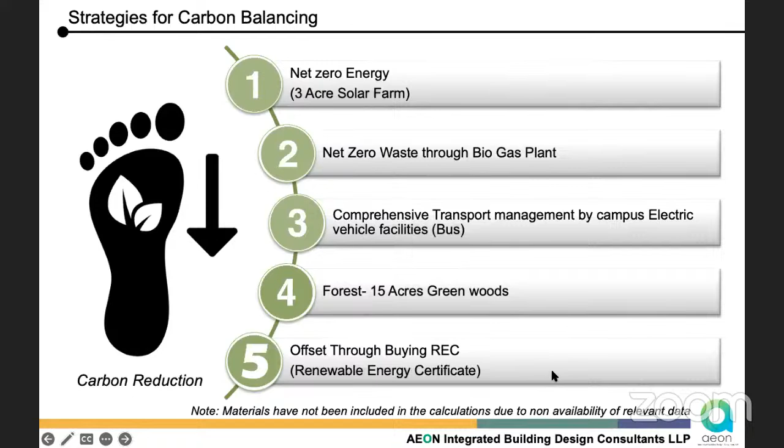These are the strategies being used for reducing the carbon emissions. So net zero energy, as I said, 3-acre solar farm, net zero waste, comprehensive transportation management by electric buses, so most of the commute of the people will happen through these electric buses. A forest of around 15 acres is being developed to sequester the carbon emissions coming out, and offset through buying renewable energy certificates for the offsite renewable energy that we have.

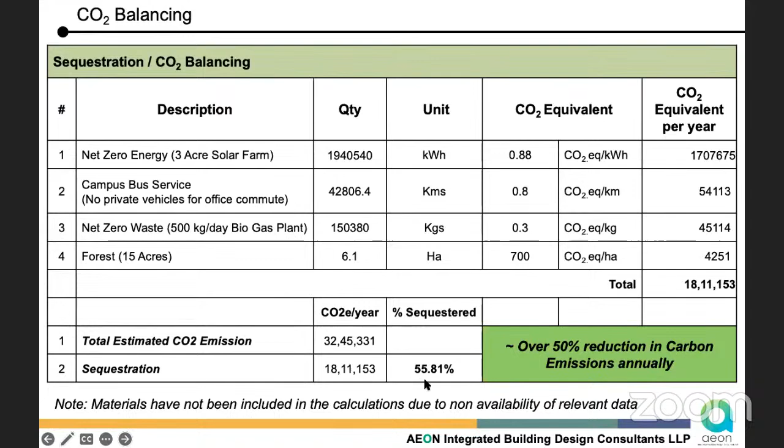Overall, through these strategies, there is a reduction that we are able to get, and the sequestration is happening to around 55% of the total carbon emissions, which is being achieved. So, carbon emissions, carbon balancing. With a combination of these strategies, we are able to offset around 50% of carbon emissions.

Further strategies being explored include low carbon materials and technologies, larger solar farms, and increased forest area. Within forestry, we also need to consider what kind of trees to use, because every tree has a different carbon sequestration capacity. So looking at trees with higher carbon sequestration capacity is actually being studied.

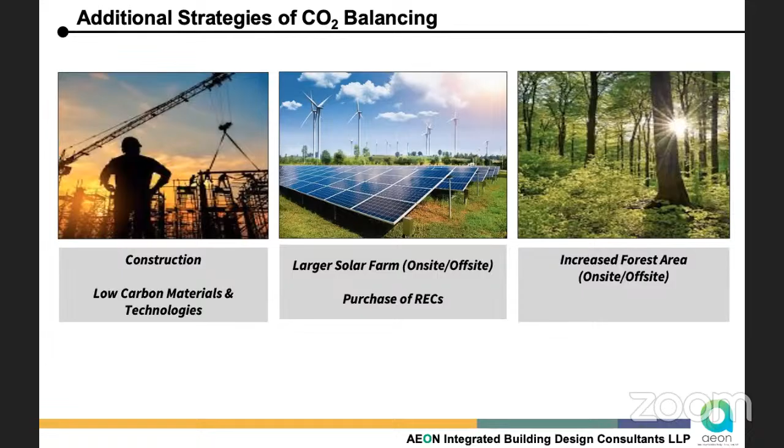So stepping towards carbon neutrality is something that promises to move towards a cleaner environment in the future, and that's what we feel the future should be: zero. This has been the genesis for our whole design philosophy at Aeon, and it's being practiced in our projects and also in our own built spaces. Thank you so much.

Thank you, Ashish. Thank you very much for advising us on all the great things that are doable and how a project can achieve net zero status, both in terms of energy, water, waste, and ultimately carbon. Thank you. Thank you very much.